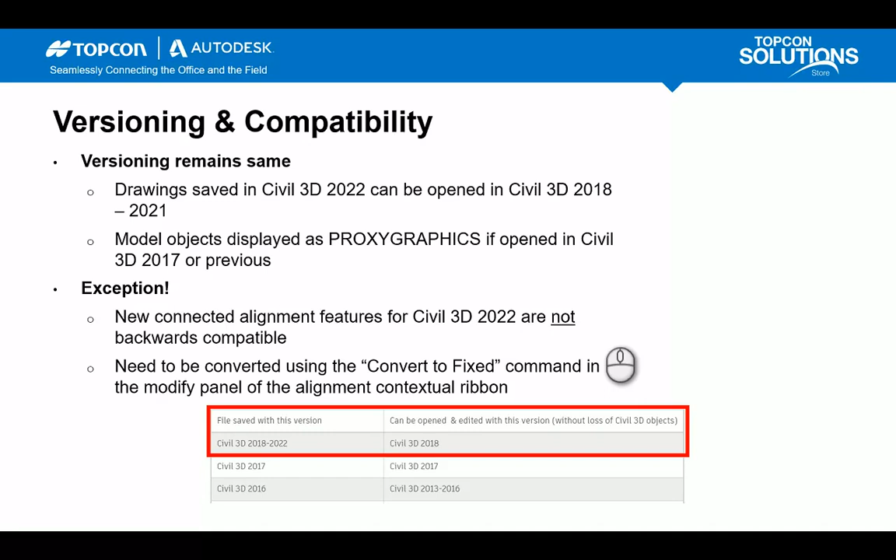With 2022, the versioning remains the same. So from 2018 to 2022, you can open a file and it's backwards compatible. That being said, there are some exceptions, and the exception is the connected alignment feature in Civil 3D 2022. They're not backwards compatible. So you need to use the convert to fixed command in order to revert that to a previous version. It's just because Civil 3D 2022 is looking at features that Civil 3D 2021 and previous can't see. So just keep in mind, if you're using the new connected alignment feature, you're not going to want to just open that up in 2021 or previous. You're going to want to use that convert to fixed command before going backwards.

You may have noticed when you install Civil 3D 2022, there's a welcome screen in the bottom right. It says, can you give us some feedback based on your industry? This isn't impacting your workflow in Civil 3D. It's not going to impact your profile or anything customized in that form. It's really for Autodesk to be able to look at who's using our software and how can we tailor that to the user's experience.

So they're just trying to understand how Civil 3D is being used and what updates to push, what enhancements to push, where to prioritize, backlogs in terms of where things are, where the software is going. So you may have noticed that, and I would hope down the road that maybe we see some things get tailored specifically to each user's needs.

So the installation experience is slightly different with 2022. We see some components that are a part of it, and we also see some components that are separate add-ons with it as well. So first thing, the Autodesk Batch Save utility. That was a separate add-on. You'd have to add it into your installation. It's not that it didn't come with the installation, you just had to select it to install. Now with 2022, that comes automatically with it, so you don't have to worry about, did I install the Batch Save utility when I was installing Civil 3D.

Storm and Sanitary Analysis, if you're unfamiliar, is a separate application from Civil 3D. It's launched separately, so you go through your Windows key, search storm and sanitary, and that would be launching Storm and Sanitary Analysis. This previously came with the Civil 3D installation, and now it comes separately. So you'll install Civil 3D 2022, and then you'll have an option to install Storm and Sanitary through the desktop app or at manage.autodesk.com. So you do need Civil 3D to install it, but it is a separate installation.

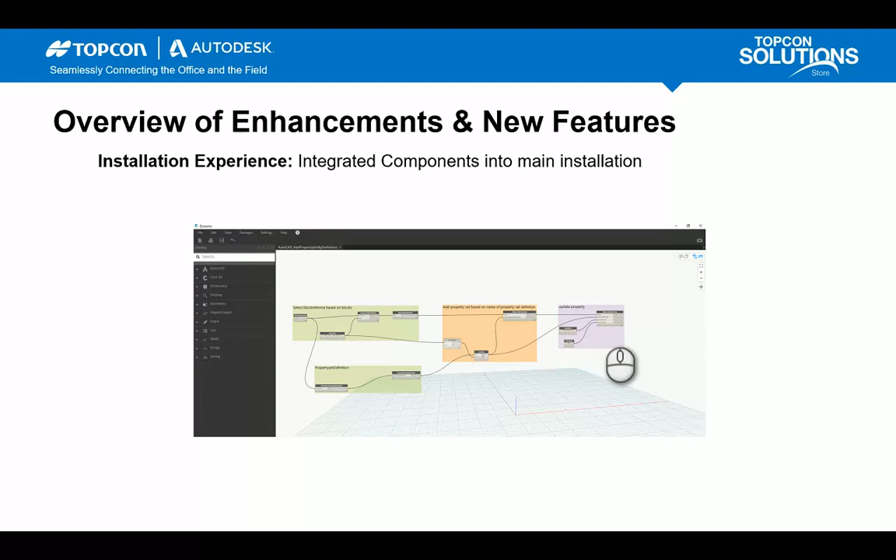So pressure networks, new features and commands. One thing you'll notice with the direction Autodesk has been trending is we're seeing a lot of enhancements, a lot of new workflows, a lot of changes for pressure networks. So the first thing that came out with Civil 3D 2022 is the regen pressure solid command. This command basically just regenerates 3D solids for pressure network parts. The profile ribbon is updated for pressure networks to make it more consistent with the plan layout ribbon.

Spanning labels created in plan and profile view. So you can create them in plan and profile view now. PVIs removed from overridden station ranges in profile view. So for PVIs that are set to static, when selected, the clean up PVIs checkbox on the pipe run profile settings dialog box removes the PVIs from the overridden station ranges.

And I'm just going to touch on the Civil 3D 2021.1 beta. So update 3 for that came out yesterday. What Autodesk does is they'll release these betas to the public through the Autodesk Infrastructure website. I have a link to that further down the presentation if you're interested. Autodesk will say, hey, we're going to release this beta. This is what we're thinking about including. If you'd like to test it, you can give us feedback on it.

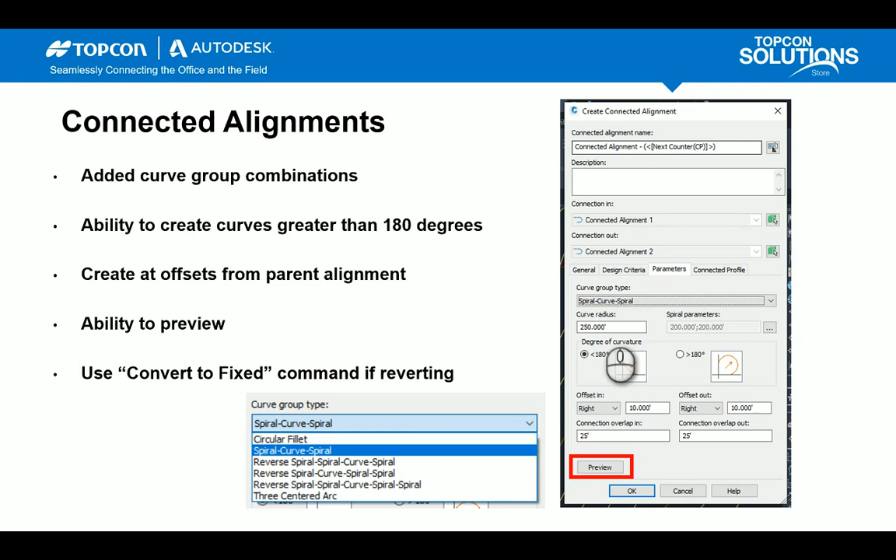So I'm just going to play this video here. This video was released by Autodesk, and it touches on the features of connected alignment and what they can do.

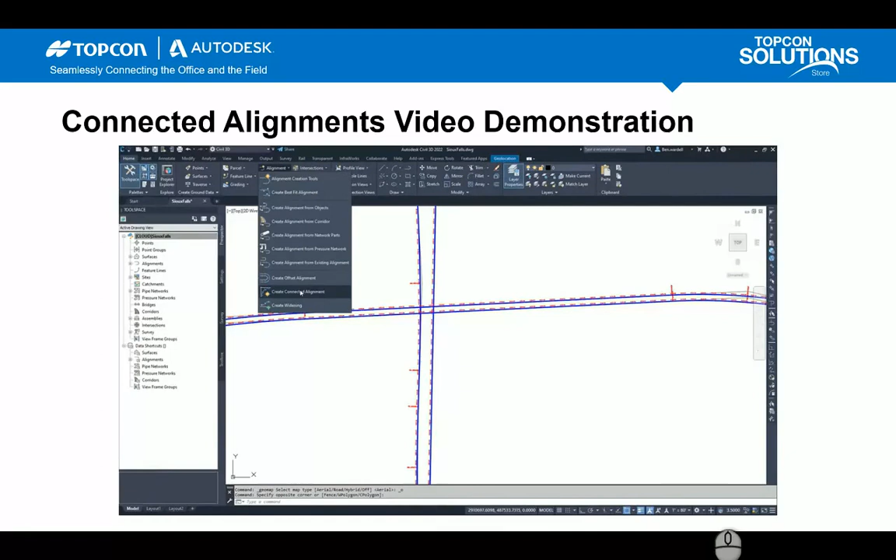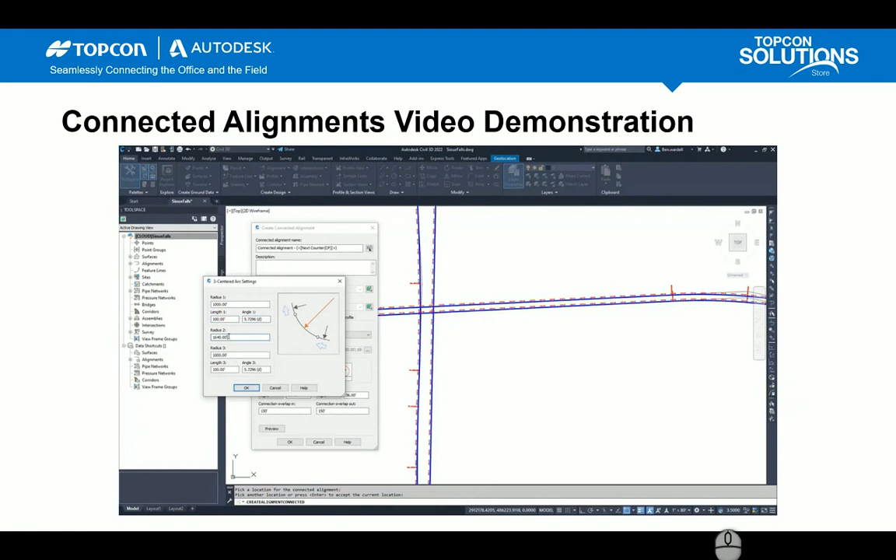Civil 3D, what's new for 2022: connected alignment. We're going to see here we have some sort of intersection design, with some alignments crossing, and we're going to create a connected alignment right here. You'll see that we have improved control—a lot of these features are the same, like the general design criteria, but this parameters tab is new, with multiple different curve group types. You have options to edit these arc parameters, adjust the lengths, make edits to the radiuses and those lengths, and create and add those into your drawing.

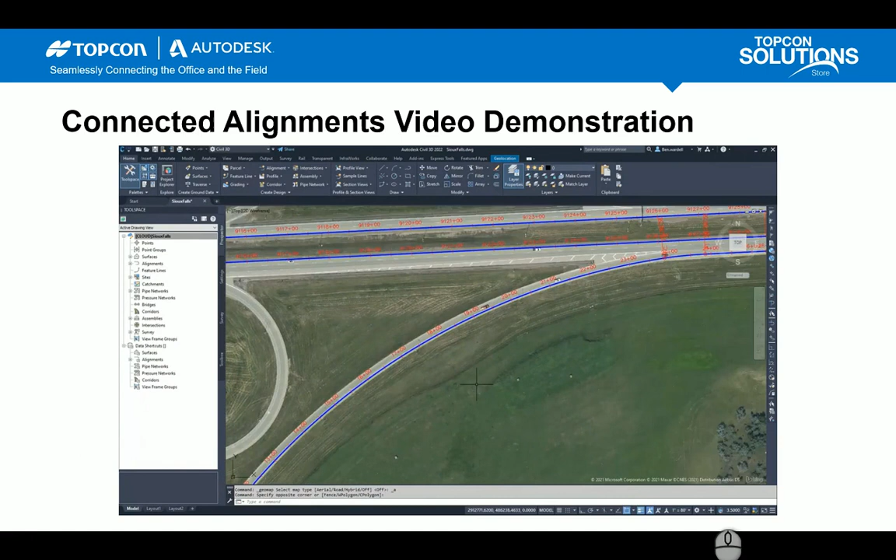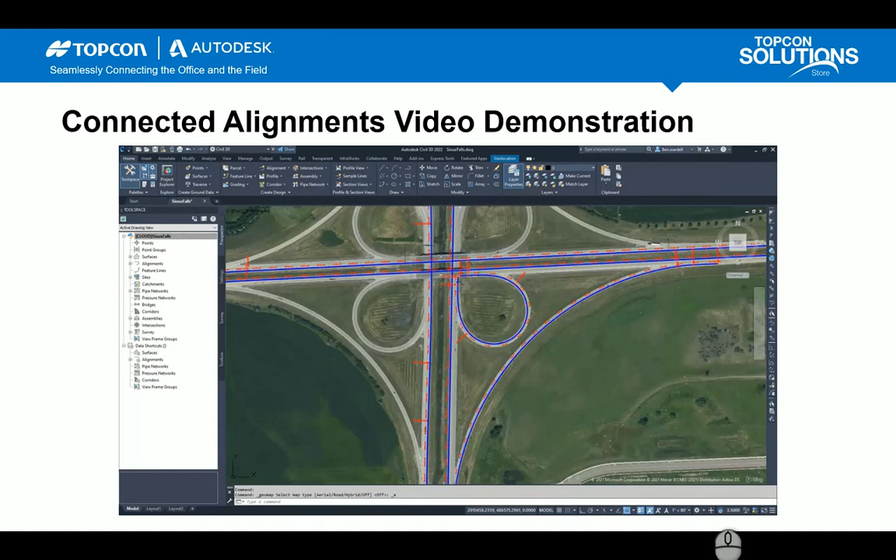The next thing you can do with connected alignments is create those larger than 180 degree curves, using the spiral-curve-spiral option, which you can edit as well. Select OK, and then connect those to the profile crossing alignments based on the offset cross-slope. In plan view, you can dynamically control the grips, which is directly tied to everything else, giving you precise intersection design based on the exact parameters you want. That's connected alignments in a nutshell.

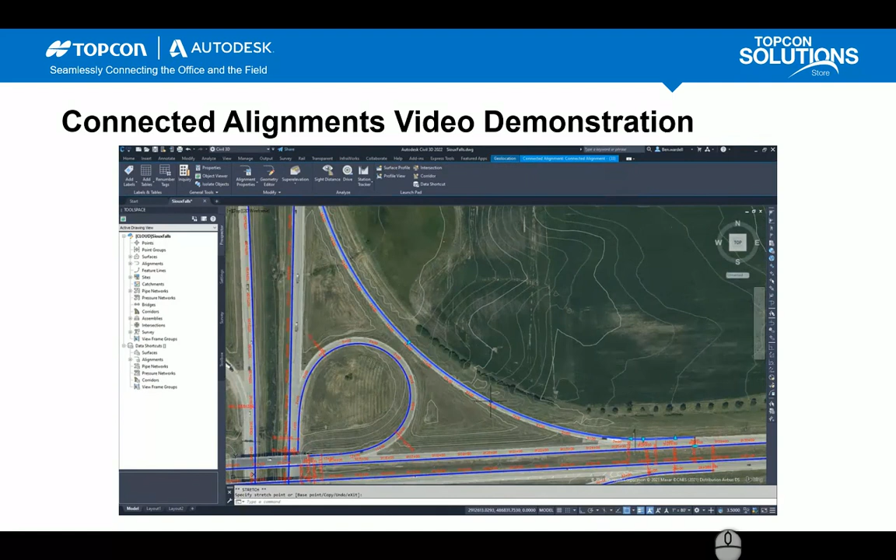Moving along, we're going to bounce into Project Explorer. Project Explorer came out about this time last year—Autodesk likes to debut products before AU and show where the product is going. One thing you'll notice with Project Explorer in 2022 is that it's now located on the Home tab. It used to be buried in one of the other tabs and was a little challenging to find, so now when you open Civil 3D, Project Explorer is right there on the Home tab.

Mainly what's happened with Project Explorer is they've enhanced the functionality already included with it. What we've seen with 2022 is added support for pressure networks, including the ability to display and edit pressure network information, edit multiple pressure network properties, include object sets for pressure networks, generate reports and tables for networks, parts, and pipe runs, compare pipe runs to other services and surfaces, and search for networks by name.

A lot of this is very similar to the features already included with gravity networks. One thing that was important for gravity networks was the ability to swap multiple gravity network parts at the same time. Pressure networks already has that included with Civil 3D, but it's done in plan view—you won't be able to swap them in Project Explorer, but you can swap them in plan view. All the other functionality is very similar to gravity networks.

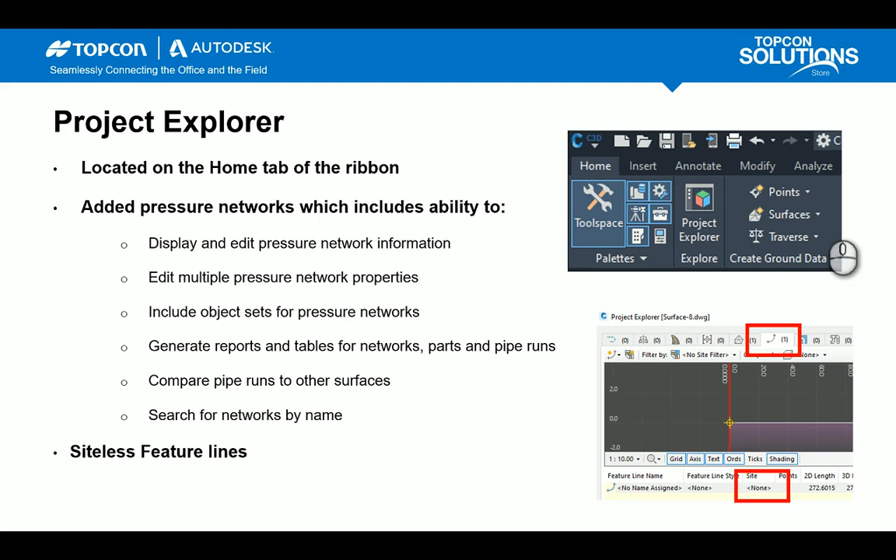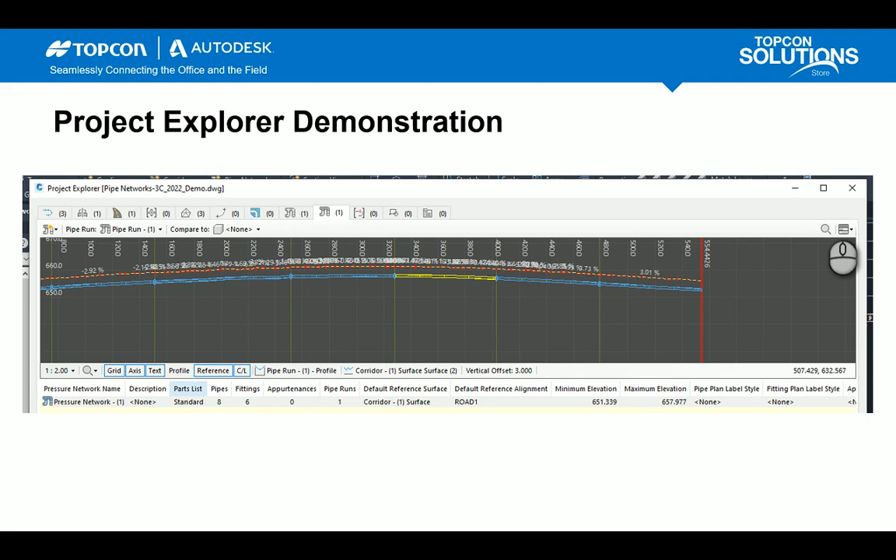Let's bounce over to Civil 3D. We're going to take a look at Project Explorer and generate a report for it with pressure networks to show you that workflow and what you can do with it. I'll also give a quick overview of customizing your Project Explorer view if you want to go that route. So jumping into Civil 3D here.

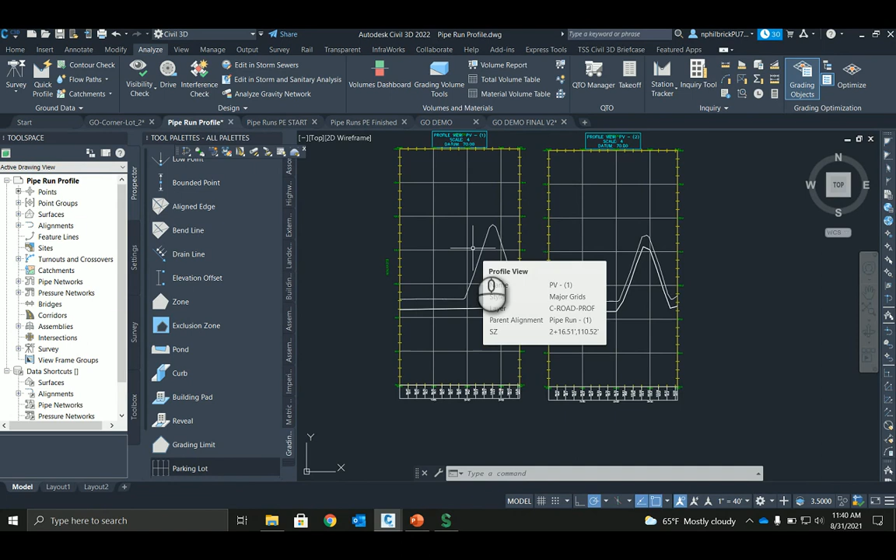First I wanted to talk about the pipe run workflow and what I meant by the parts list with that cut length. This is what Autodesk has also fixed with the beta build, or is moving in that direction to fix. I have two long pipes placed right over a hill, so we get some movement of the pipe trying to follow the surface. This first one was created in 2021, and you'll notice this pipe has no cut length defined, so it doesn't follow the surface based on the cut length. In 2022, you'll notice that it is following the surface now.

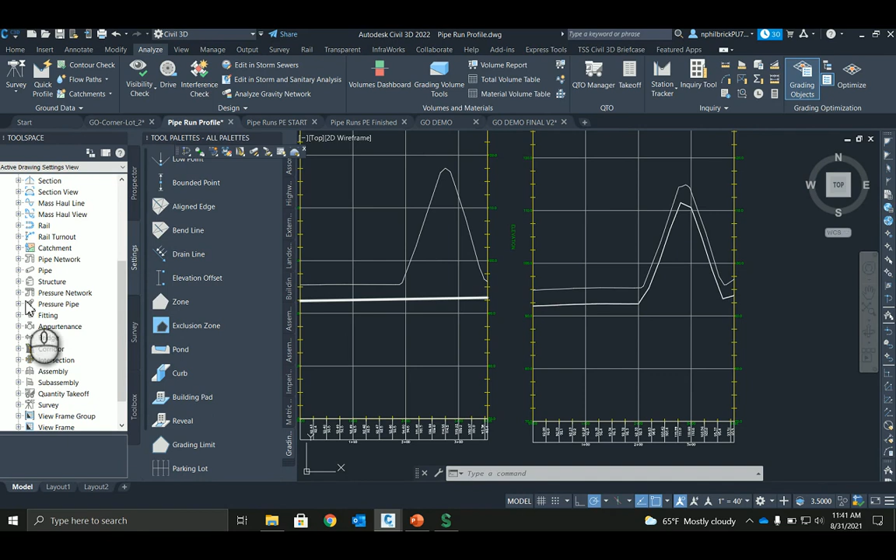One thing I find a little confusing is if you go into your pressure network parts list—let's edit this part list, and I'll show you where that cut length resides. Let's edit this one, the pipes. You see that this cut length is set at 20 feet, and this parts list is where you can change that cut length. This parts list I'm displaying is the HDPE parts list. A lot of the parts lists that come with the Civil 3D installation do not have a cut length defined.

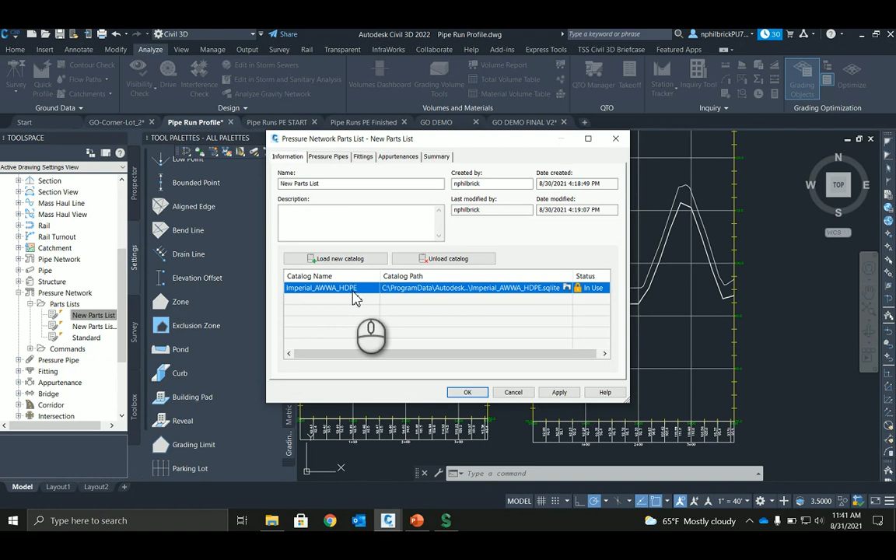So what it looks like happened is if you open up the content catalog editor, you can open up the pipes and see what the cut lengths are. A lot of them don't have them defined, but when you bring them into Civil 3D, they get assigned this 20-foot cut length. I'd encourage you to make sure your desired cut length is defined so the profiles display correctly. Autodesk is working towards fixing this, but also do your due diligence to make sure those cut lengths are defined. So moving over to Project Explorer here.

This is a fairly simple drawing, one of the tutorial drawings. We have a gravity network, a pressure network, a corridor, and a couple feature lines, one on a site, one not on a site. So Home tab, Project Explorer, and we're going to launch Project Explorer here.

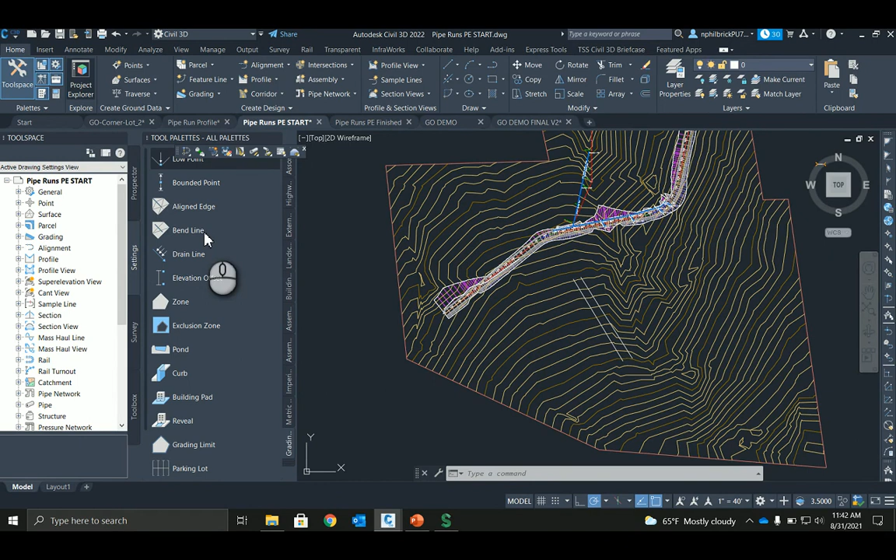There we go. Let me just try and make this as big as possible on this screen. Okay, here we go. In Project Explorer, you can see we have multiple tabs up here. This includes all the Civil 3D entities in the drawing - assemblies, corridors, surfaces.

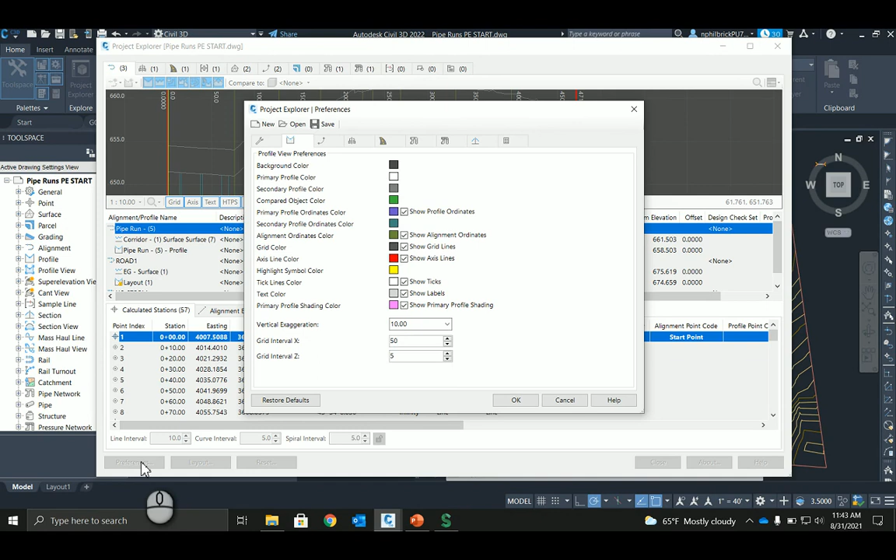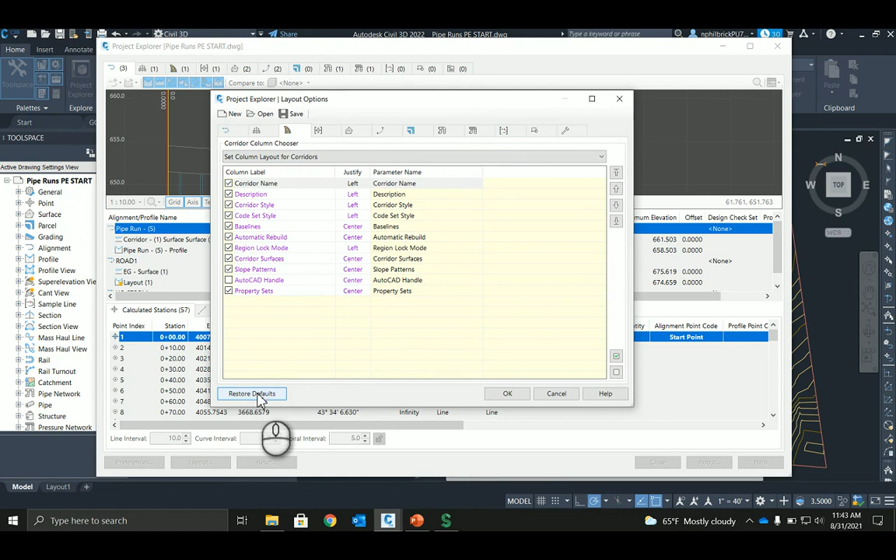One thing you can do here is customize your Project Explorer view. So preferences is all going to be your colors, basically how everything is displayed - it's not what content is displayed, it's how. You can make customizations with vertical exaggeration, grid interval in the Z direction, all editable in your preferences. In terms of layout, this is where you choose what content you want displayed in the Project Explorer window - there's a lot you can choose, and a lot you can choose to hide as well. I'm running it as the default, so the restore default command - you'll notice it probably looks exactly like how mine is displayed.

One thing you'll notice is, let's say I go to my pipe networks here - pipe network, give that a second to load - you'll notice there's a lot of blank columns. Some columns may not be necessary, so you can definitely customize things to what you want to have.

Moving into what's new, the pressure networks right here - this is the new tab you're going to see in Project Explorer. All those features that are with gravity networks are very similar with pressure networks now. What I'm going to do is add that, I'm going to create an object set. We're going to create a pressure network report, place it in Plan View in Civil 3D, and I'll show you how to create those tables and customizations if you want to go that route. It's really just a great way to view your data and create tables easily.

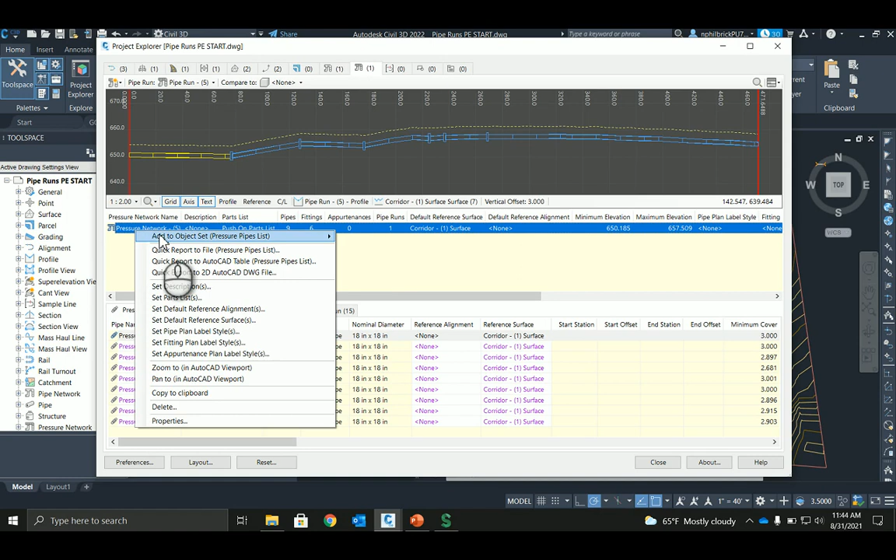So this pressure network right here, pressure network 5, this is with that push-on parts list that comes with the Civil 3D installation. It's got 9 pipes, 6 fittings, and it's 1 pipe run. What we're going to do is say add to object set, and we're just going to create a new object set. It's asking for a new one because I don't have one created, so we'll just call this pressure network object set.

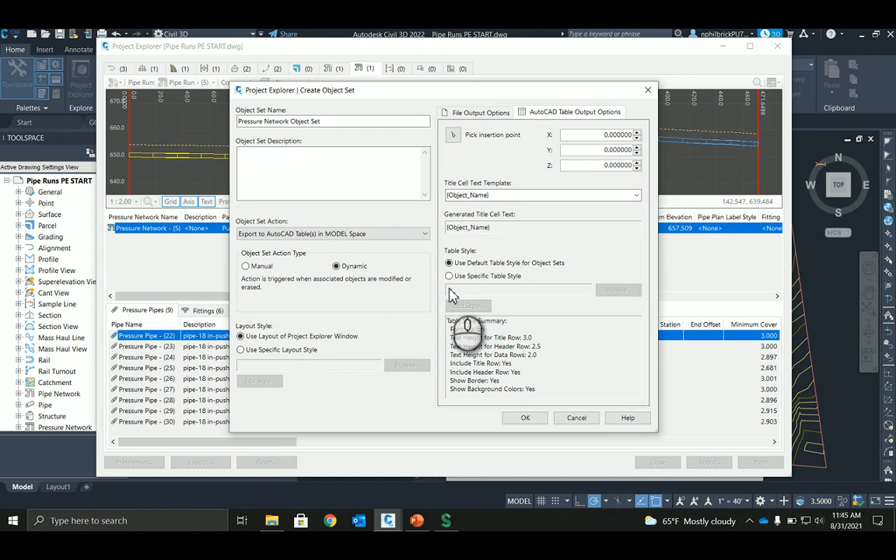This is where it's going to ask you what action you want for the object set. What I'm going to do is say export to AutoCAD tables in model space. Then you have an option to select action type - manual, dynamic, actions triggered when associated objects are modified or erased. This is where you can get into the customizations, the layout style. I'm going to leave it as the default, but you can go in here, edit style, and then edit how the layout is portrayed. There's a lot you can do in here.

One thing about the object set is that object sets aren't tied to a specific part. So it's not like pressure networks are the object set - you can have, for example, that gravity network in that same object set.

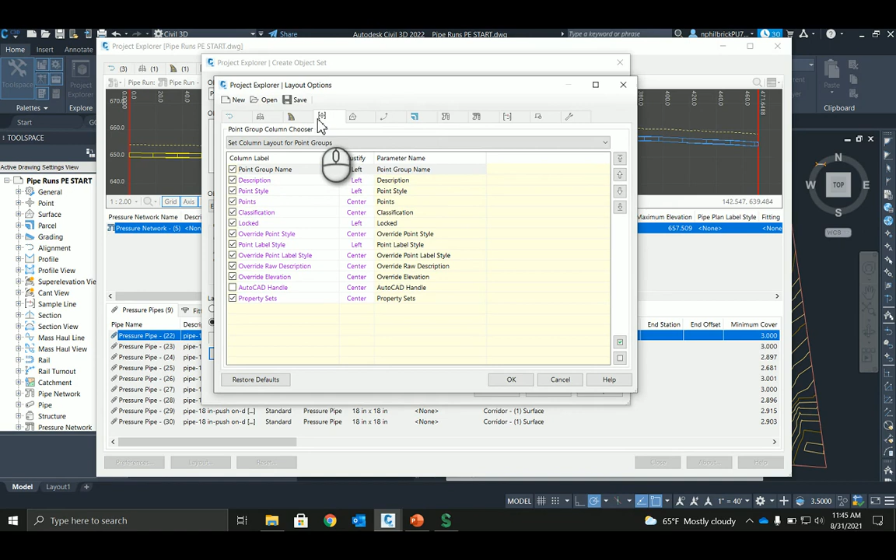Let's just leave this as the default. Oh, and one other thing with the object styles is you can save them, and then you can load them in, so you can have your set standards that you want your tables to look like and whatnot. And then we'll use layout, so that's grayed out. And then table style, same exact thing. Customize that. You can load in your custom ones. So plenty of customizations you can do with those reports.

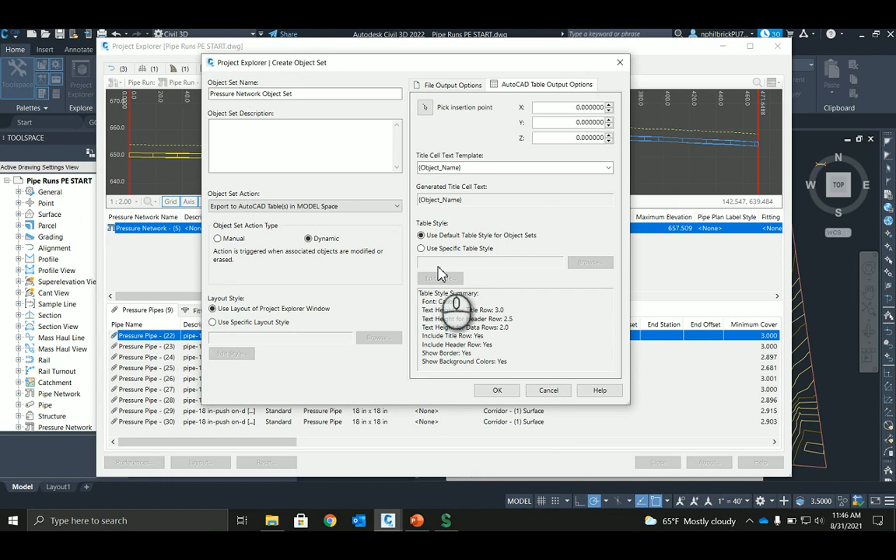And when we say OK here, it's going to say object set added. There we go. New object set was successfully created. Now it contains 1 object. Okay, cool. So then if we go over here to the reports tab, you're going to see now we have a 1 here. That means we have an object set. And then here's the object set.

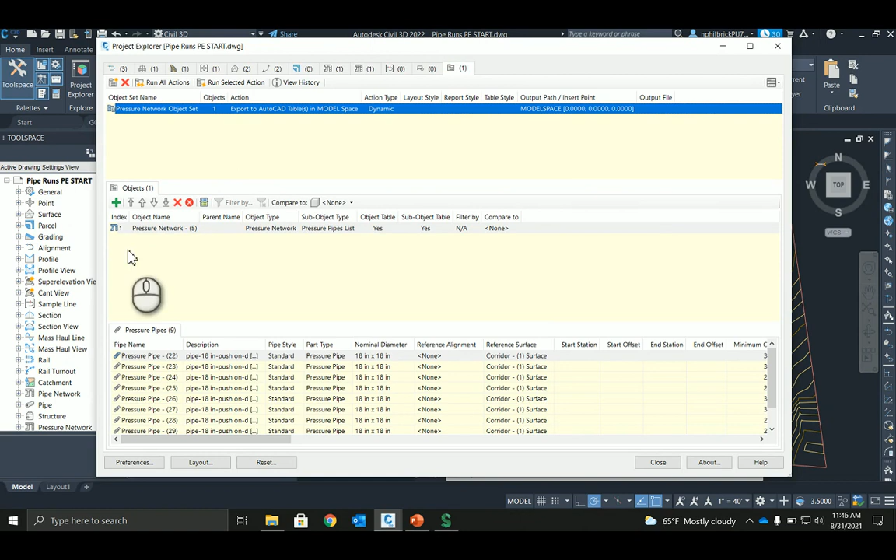So this is it. Action, export to AutoCAD tables, dynamic, model space insertion point. And then here's the pressure network. And then quick report to AutoCAD table. And then use layout. So we'll just leave it all the standard. Use Project Explorer table style. Use Project Explorer window. And then we're going to say OK.

And then you're going to see down here on the command line, it says enter table insertion point. So I'm just going to minimize this here. And we're just going to come over here to some blank space. And you're going to see that created that table for that pressure network.

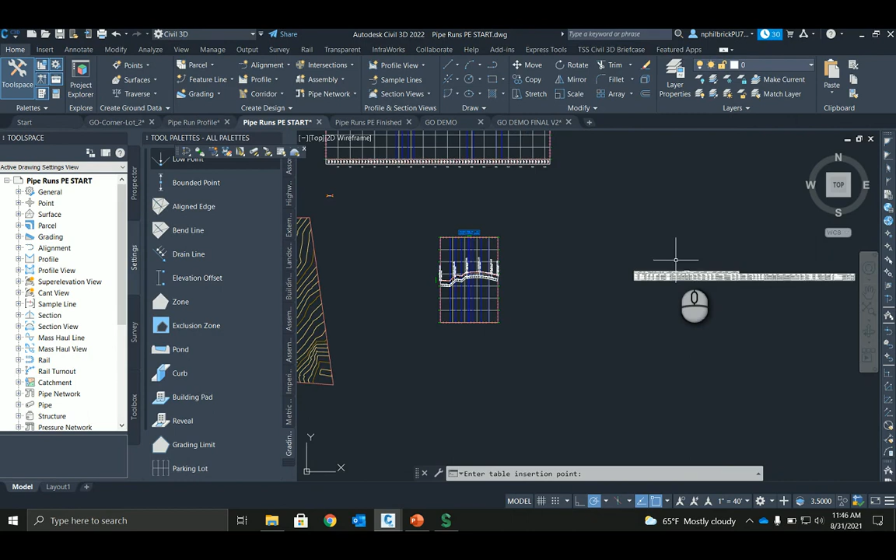So nothing's really changed in terms of Project Explorer a whole lot in terms of what it could do when it first came out versus what it can do now. But there's just a lot of added features to it, pressure networks, siteless feature lines that are included. And moving along here, back to the presentation.

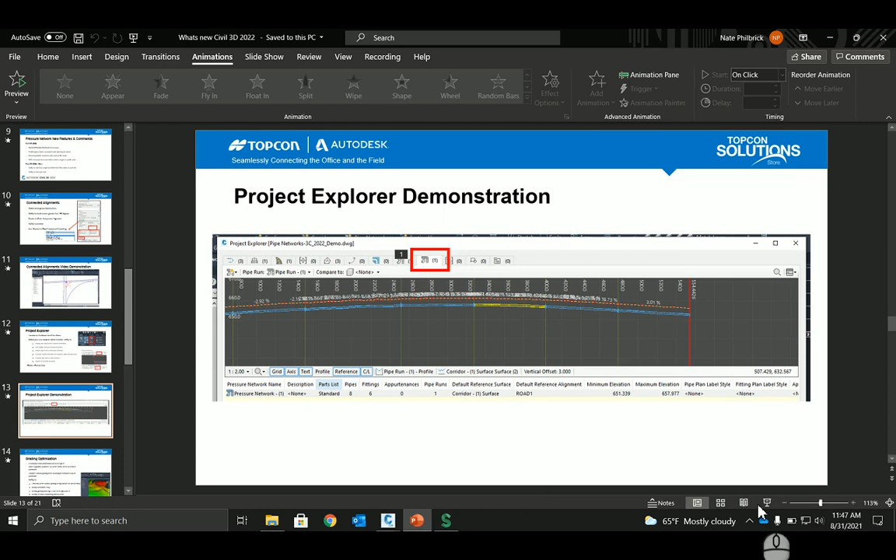Okay, grading optimization. This is by far my favorite thing that's new with Civil 3D 2022. I spent a lot of time playing around with it. It's definitely a bit different in how it works. It's got an optimizer. It uses a computer algorithm. It'll run for 10, 15, 20 minutes and just keep on optimizing that surface. It's a super cool tool, but it's definitely something that's a bit different.

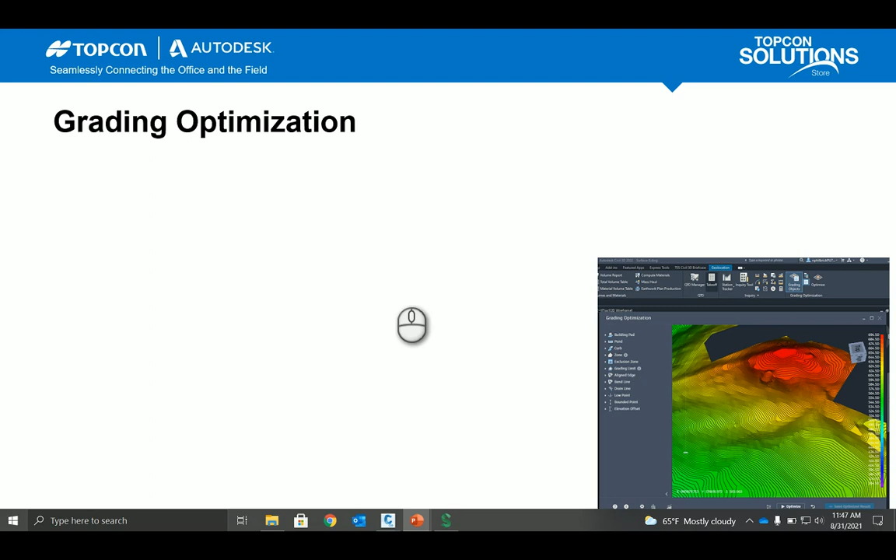And we'll go over the process to create that project and what to look for, where it fits into your design needs and whatnot. So grading optimization is a great preliminary terrain optimization tool for designers. Utilizes an algorithm commonly referred to as the optimizer. Creates a surface based on defined constraints. So those constraints are in a polyline format. You have your lines and add those in, and then the optimizer will go through and pick like, okay, we can do this here, we can do that here.

One thing that's nice about this is it eliminates manual grading tasks according to customized object constraints. So it doesn't need to be perfect in what you're doing, but if you have an idea, you can run the optimizer several iterations and get a real good idea of what would be the best scenario that minimizes cut and fill if you want.

And what grading optimization does, it gives you the ability to efficiently create multiple grading design options for consideration. It's really easy to turn grading options off, turn them on, rerun the optimizer. You can send multiple surfaces back to Civil 3D, and you can just keep iterating it to get exactly what you want. You can easily modify the constraints. You can identify grading challenges early in your design process and identify scenarios minimizing material waste.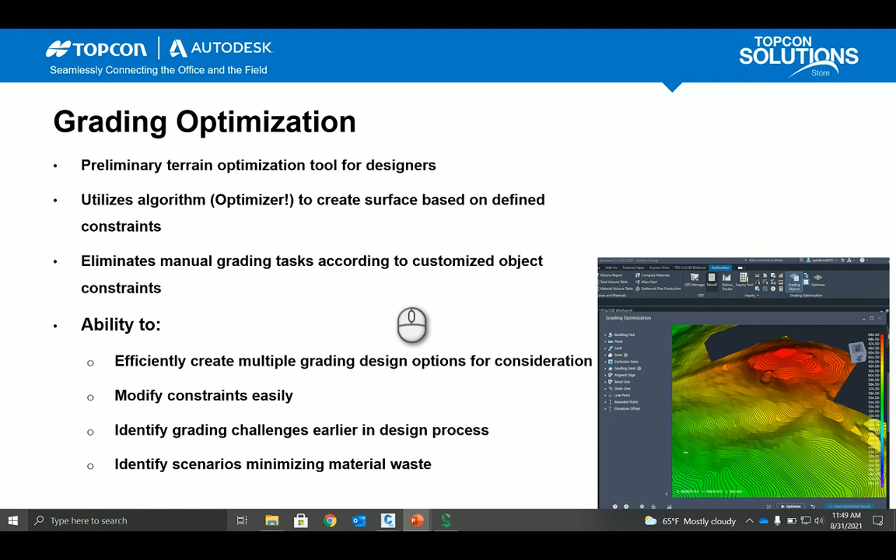And a couple of things that you do need before you get into grading optimization. The first thing that you need is a surface representing existing grade. You need to define boundaries representing grading limit within the extent of the EG surface. So basically, what you're trying to grade needs to be within the EG surface constraints. Some idea of your drainage plan or direction. You can be pretty broad with grading optimization in terms of what you want to do, but a general consensus, like we're trying to go in this direction. You definitely need to have that before you get into it.

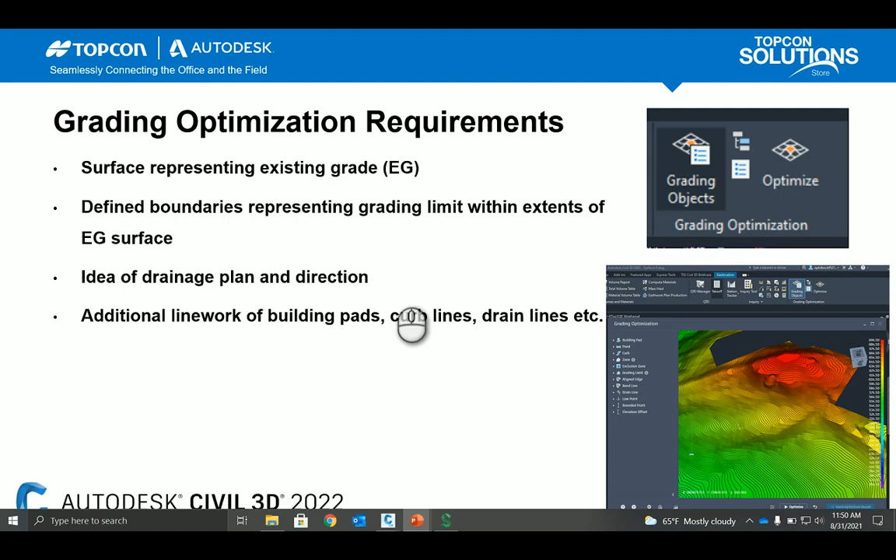And it's good to have, it's not fully needed, but additional line work, building pads, curb lines, drain lines. The more data you have in there, the more accurate your surface is going to be, and the better idea you can get of where grading issues may lie, or developing that design. Grading optimization layout. So there's two main entities of grading objects.

First one's the grading object tools. So this is basically all the options for what you can create, and you have the options to customize this as you go. So you could right click on this, click on the properties, and customize them if you had a bunch of different grading objects that were going to carry the same standards.

The second thing you'll notice that is part of the grading optimization panel is the grading objects browser. What this displays is what has been created with the object tools. So for example, you see that top one there is building pad. None of these in the objects browser have anything in them, but the building pad will show a 1 next to it if you have one building pad defined in your drawing, or one pond, one curb, and you can have multiple of the same thing as well.

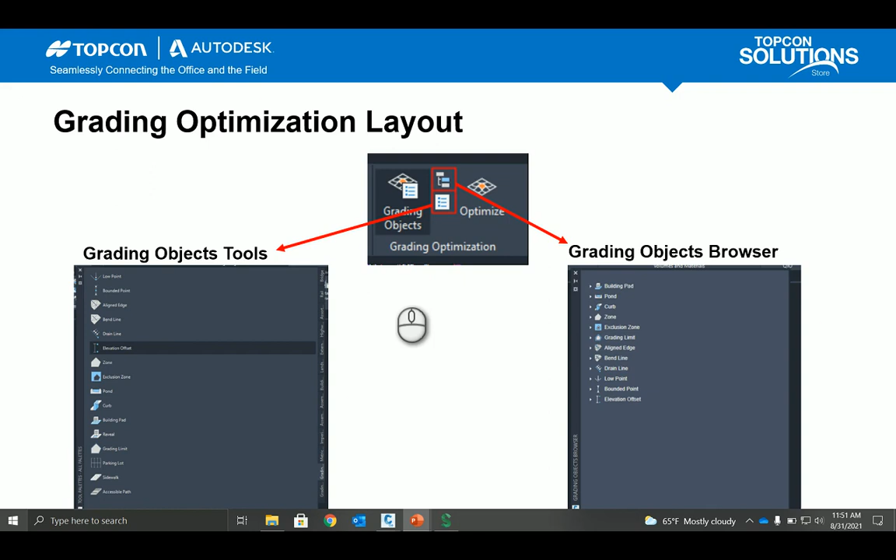And then the types of grading objects, from that grading object tools. There's 3 different types of objects you can have in your drawing. The first are points, and that's low point and bounded point. A low point is the lowest point in an optimized area, and a bounded point sets an elevation point to a bounded target. These will be COGO points in your drawing.

The second type of grading object is lines, and there's several different types of lines: aligned edge, bend line. Drain line is going to be pretty popular for your use. What that's going to define is your drain lines in your grading plan. One thing to note with your drain lines is it's important how that line was drawn. The first point to the end point is going to be the way it's draining, even though there's no 3D entities to it. So it's important to make sure that how you're drawing those lines is how you physically want it to drain.

And one thing that'll actually be part of 2 is curbs. So a curb can be a line, and it can also be a zone, which we'll get to in a second. And a reveal line, used in conjunction with building pads to override elevations for items such as ramps, stairs, and truck wells.

And then the last thing is zones. Zones are going to be one of the more popular things used, and there's several different types of zones. The qualification for a zone is it needs to be a closed entity. It can be any shape, but it needs to be closed, versus a line, which would just be a line in your drawing. Touching on the zones, the plane zone is a number of bounded areas represented by a polyline. They're layered in a hierarchy of overriding criteria and behavior, so you can have multiple zones on top of each other.

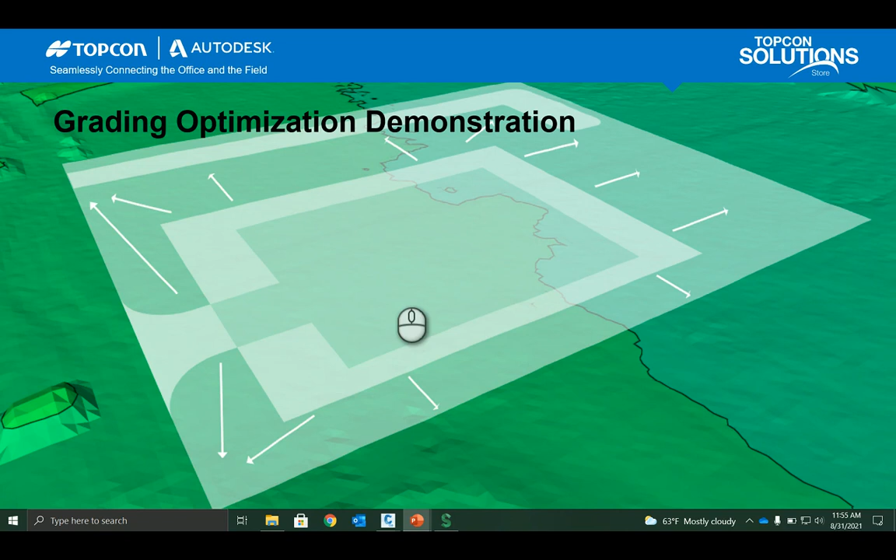And we're going to bounce over quickly to grading optimization. I'm going to take you through a project that I've developed. The building pad with some sloping. We created a pond, and we got a sidewalk in there. I'll just show you my process for how I created it. So let me bounce out of here, and then let's go into this grading optimization. Okay.

And this is a pretty cool project to me because I collected all this data, and it's at a school right near my house. So it's definitely cool to work on something that's close to home, and you can come up with some ideas of what would be around your house. So just to give you an idea how this data was collected.

So I have a drone, and I flew the drone over this site, taking photos with a pretty good overlap, and then I brought that project into ReCap Photo, stitched all those photos together, and then that ReCap Photo project created that mesh file and that point cloud output. And then what I did is I used InfraWorks to create a surface in Model Builder.

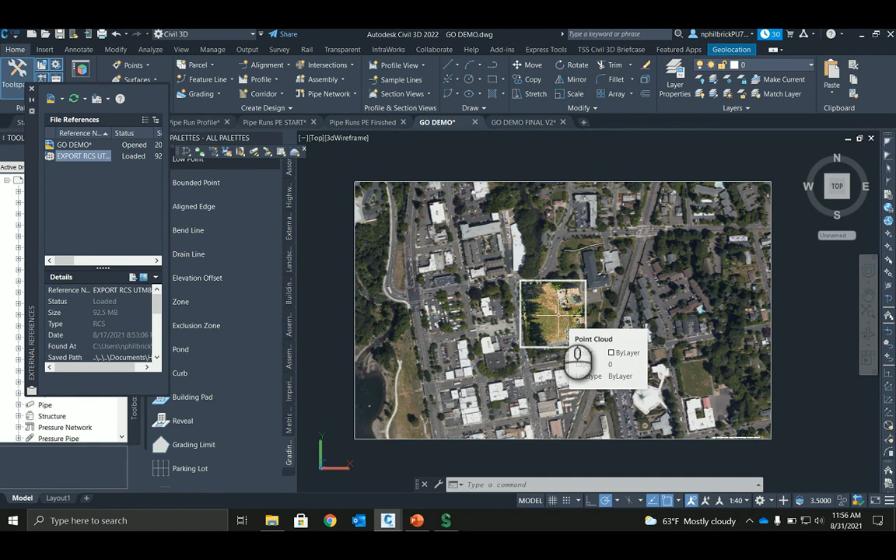So I've just defined this region right here. If I zoom out here, this is the region I defined in Model Builder. And what Model Builder does is it creates that generic, fairly accurate surface. It's not super accurate. And then what I did is I brought in that point cloud data and enhanced this surface region right here. And when we start to display the contours, you'll notice that there's a lot more triangulation in that point cloud region.

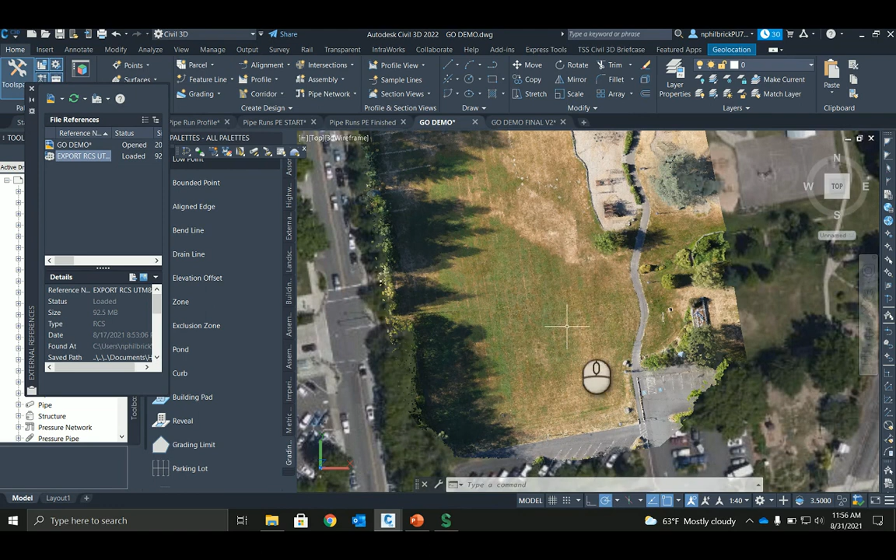And so this region right here, as I was thinking, how could I make a grading optimization design here? What would be a good idea? And I was thinking maybe some sort of athletics building in this region right here, a building pad sloping down from it. I wanted to have some sort of road or path driving up to it. So if you're driving a lawnmower or an ATV of some sort, you can get back up to the building. And then I also put a sidewalk walking around the perimeter of it.

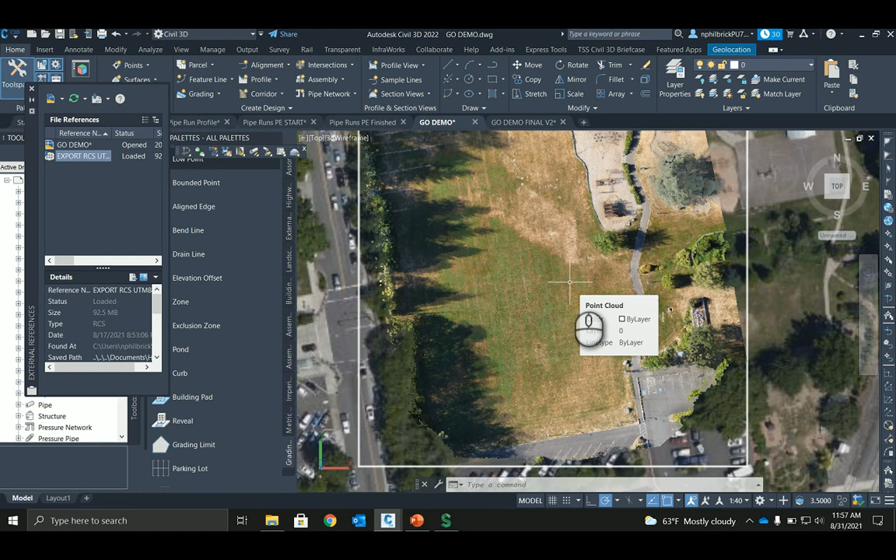But it was definitely a fun project to play around with, and definitely learn the ins and outs of grading optimization. So I'm just going to go ahead and unload this point cloud now that I gave you some background and we don't necessarily need it anymore. And this is my grading plan right here. We're just going to go through and add a few things to it. Let me close this here, and we'll leave that open. I'm just going to turn on the EG surface.

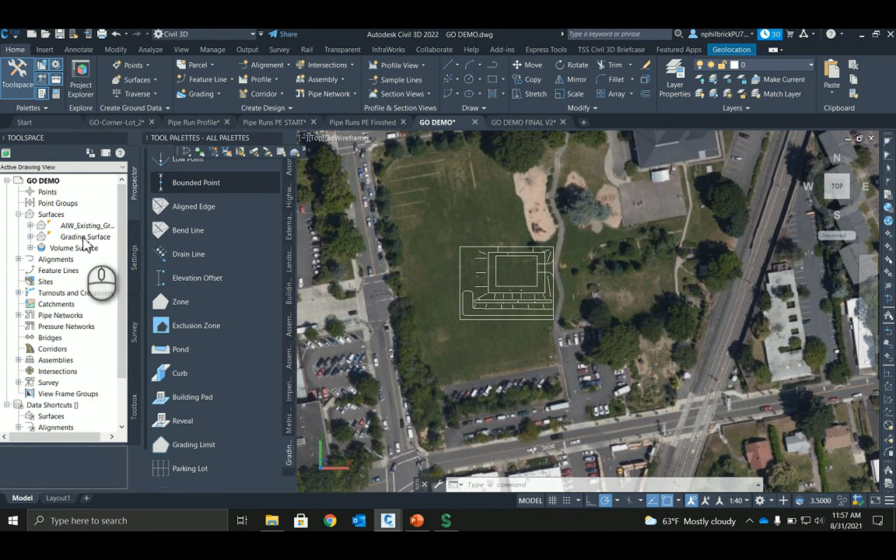Okay, so you can see we have some contours in now. You can see those Model Builder contours on the outskirts. We have those more accurate contours where the drone imagery was added in. And this is my grading plan. These are all polylines created. And what we're going to do is add in some grading objects. So Analyze tab, click on the grading objects, we get the tool palette, and then we get the grading objects browser.

And I already have a few things added in here. You're going to see I created a pond right here. I was thinking some sort of detention pond that's going to slope down from the building, and it'll slope off the sidewalk. And close that here. And then I created a curb right here as well. And we'll just add in a few things here.

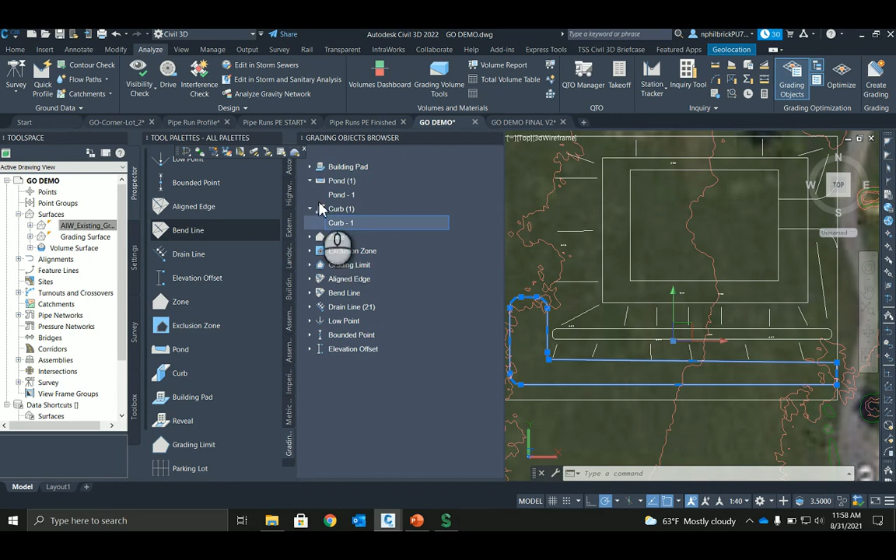And one thing that can be a little bit confusing is that when you add something in, it can seem like there's no way to get rid of it. You have to select that polyline, and if you select this and then select the delete button, that's physically going to remove the polyline in the drawing. So what you're going to want to do is right click and then say remove curb.

So that'll remove the curb entity from that polyline. And I'm going to go ahead and close the curb properties. So let's go ahead and add in a building pad here. So this is my proposed building pad area. And what we're going to do is we're going to go down here to building pad. Actually, let me deselect that.

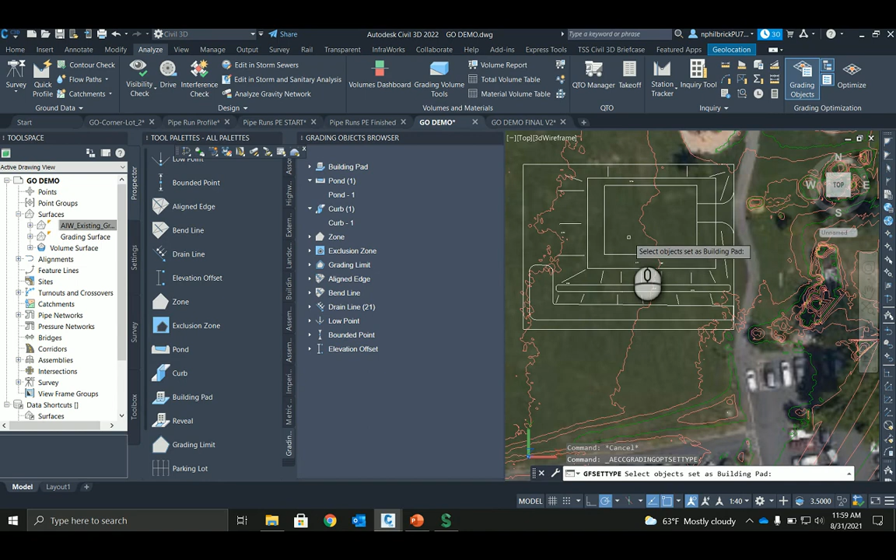Okay, building pad. And it's going to say select objects to set as building pad. Say okay. And then I'm going to give it an elevation. And I'm just going to say fixed elevation value. And this is what I was saying earlier, you can have an elevation range. So if you have an idea of the range, but I'm going to set mine right at an elevation of 13.5 feet.

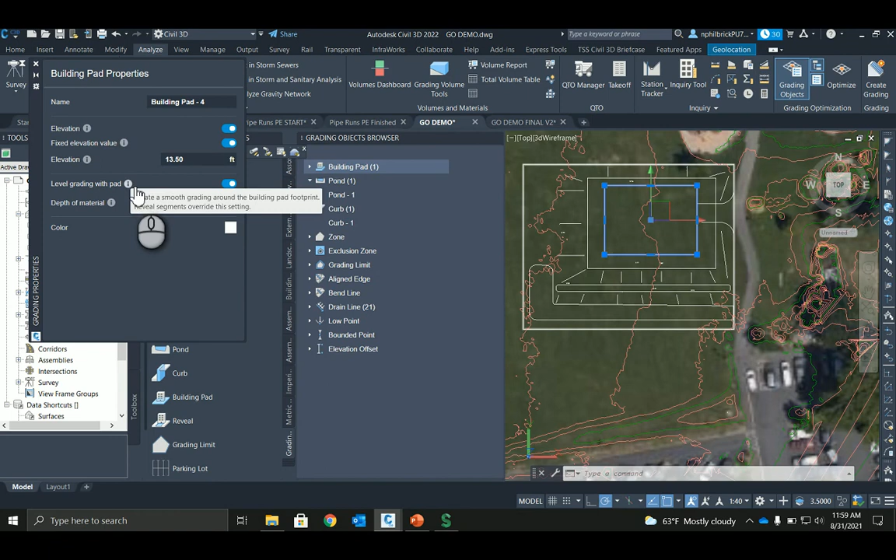There we go. And then level grading with pad, create a smooth grading around the building pad footprint, reveal segments overriding this setting. I'm going to leave that, and I'm going to close this. And you're going to see here now we have that building pad included into our plan. I'm going to add in a grading limit here, and that's the extent of what we are grading.

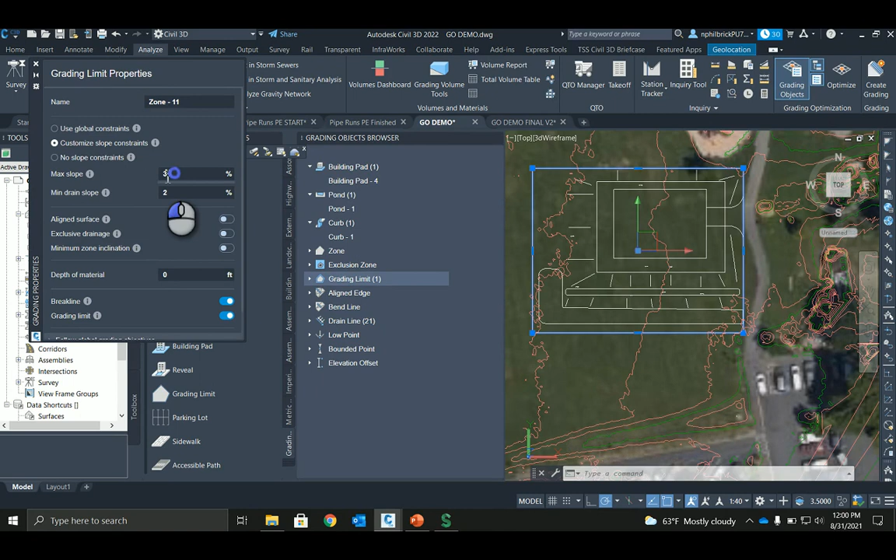And zone 11, and I'm going to use customized slope constraints. One thing to note is that if you're trying to grade with a max slope of some sort, say for example you want to grade with a slope of 3 to 1, that's going to be a max slope of 33%. And then you can have options for your min drain slope. Keep in mind you're punching in ranges, so the optimizer is going to go through and say, okay, we can make this 20% or we can make it 10% or something like that.

And then you have options for aligned surface or exclusive drainage. It's either one or the other. So an aligned surface requires that the triangles in the zone align themselves on a plane. This property cannot be combined with exclusive drainage. So if you select the align to surface, you'll notice that one's no longer enabled.

And then minimum zone inclination guarantees every triangle on the surface has a min required inclination into a given slope. And when you set this, you're going to want to make sure that this grading limit is selected here. And then we'll say yes, we'll add break lines, and we'll close this. So now that we have a grading limit defined, let's see if there's anything else we need to define in this drawing. Okay, zones. You can apply zones on top of each other and they're based on hierarchy.

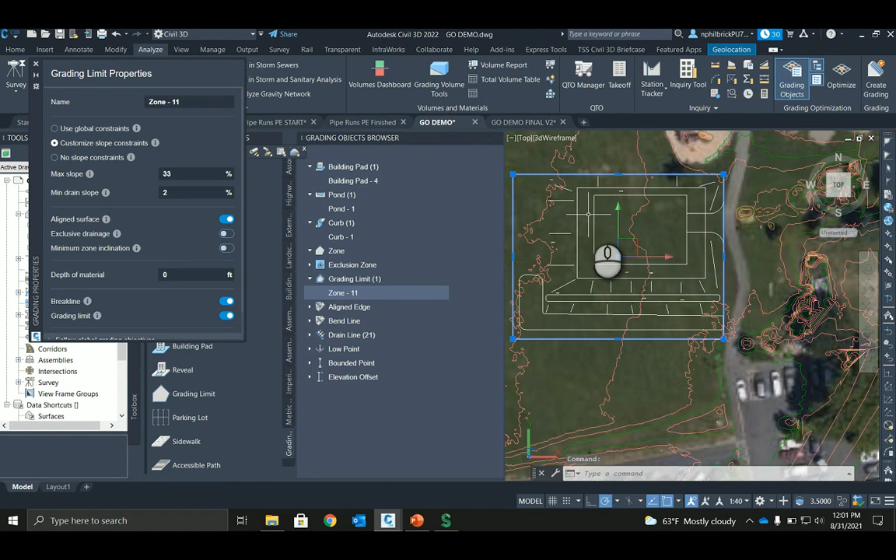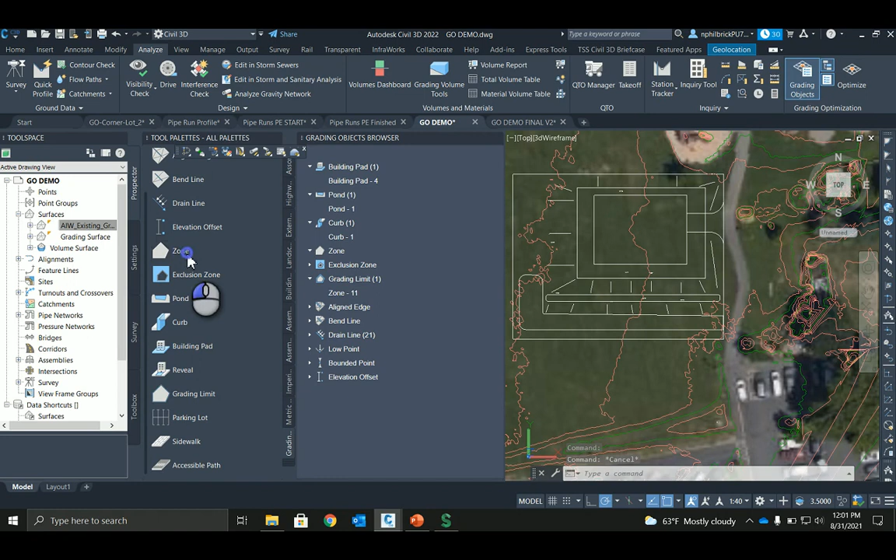So let's go ahead and add a zone right here. What I wanted to do is create a flat area around the building pad for use around the building, park that lawnmower, something like that. Work on that lawnmower. So I'm going to go down to zones, and then it's going to say select object to set as zone. Say okay. And then you have options here.

You can use global constraints, customize slope constraints. What I was thinking of doing was maybe like a 3% to a 1% slope. So we have some slope, but it's pretty level. So that's what I was thinking in terms of that table up top there. And then you have the same thing that was in that previous zone, the align to surface, exclusive drainage, whatnot.

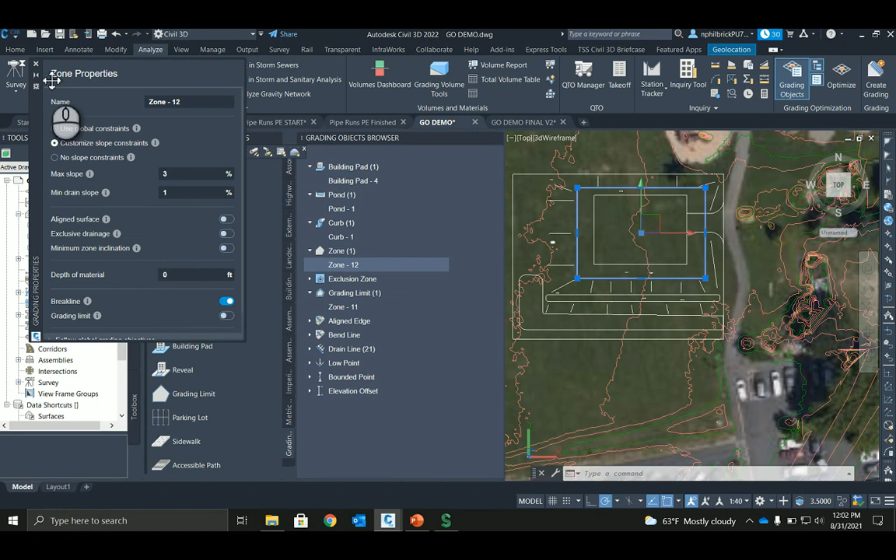I'm not going to go through and add all these just for time's sake, but you'll notice that this is the pond I've added in right here. There's a nice diagram when you create those ponds in terms of your berm, your depth, height of water, whatnot. And then here's a sidewalk I created right here. And then I also added in some drain lines. You probably don't need this many drain lines when creating your grading plan, but I wanted to slope down around the building, so that's where I ended up adding them in.

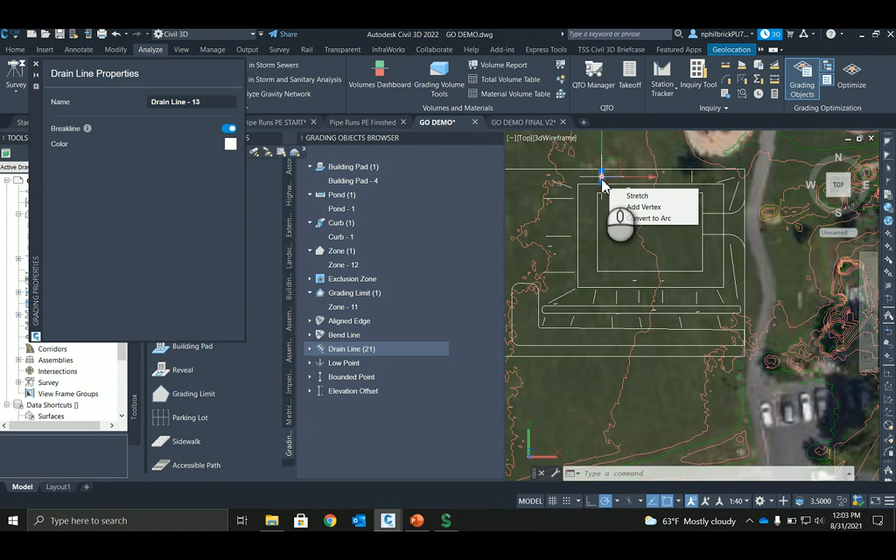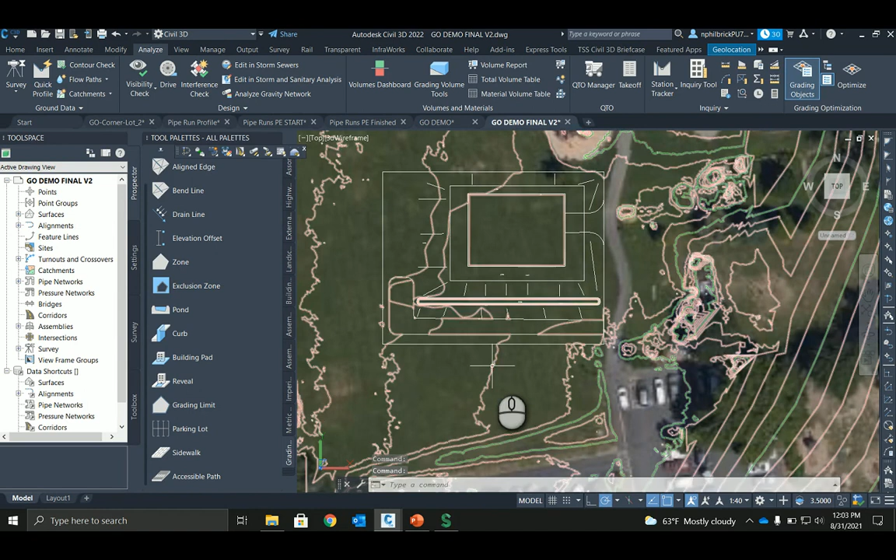So, all right, let's bounce over to this other drawing here. This one has a bunch of those grading objects added into it. And what we're going to do is get into the grading optimizer. Let me just turn this up here. Let's go to surface properties, display.

And then here, surfaces, surface properties. Okay, so this is the EG surface. I've already sent back the graded surface, but we'll take a look at that afterwards. So optimize. Then it's going to ask you which surface you want us to work with. And so we just selected that EG surface, and then you're going to see this grading optimization window start to launch.

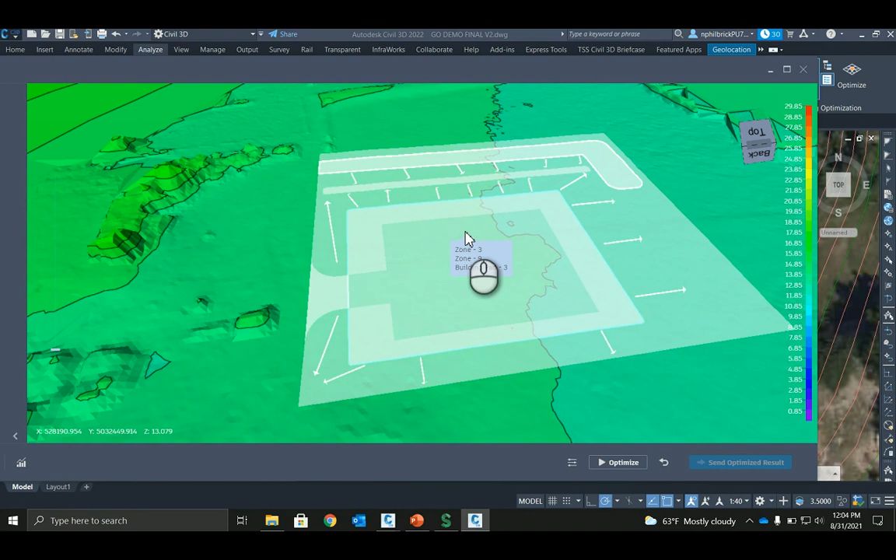You can see this is our drone surface. Then we have that broader model builder surface. You can see those drain lines are pointed away from the building. So when I said that's how you're going to want to draw, first point to second point, that's the way it's going to drain. And then we have our building pad right here. Then we have our grading limit properties. You can see all these features right here.

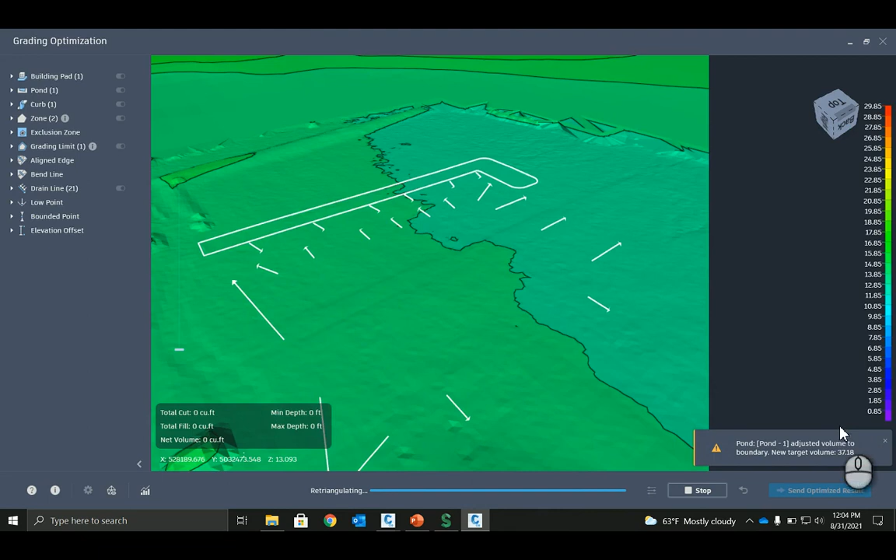And then I'm going to go ahead and start optimizing. So this button right here is optimize. When you select this, it's going to start retriangulating. What this basically says right here is we're just going to change your pond volume. And then you're going to see that the surface starts to change. There's a lot of great visualization tools as you get working with it. For example, you can display those triangles, and you can see that things are starting to move, starting to think. It's starting to create that building pad and follow those drain lines.

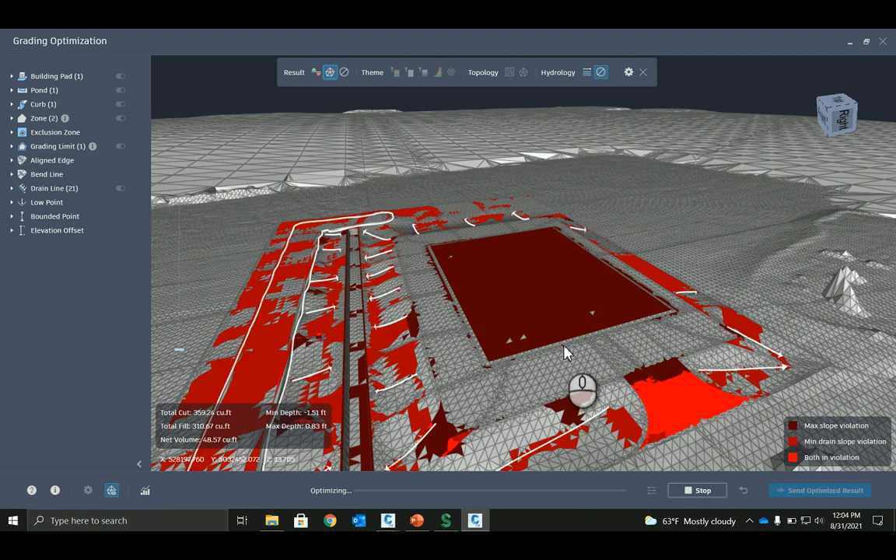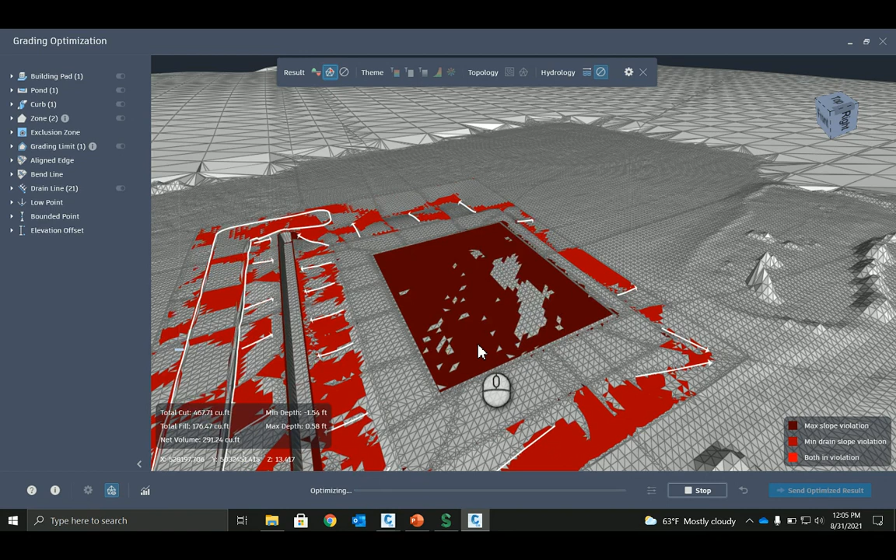One thing that I find to be really helpful when you're working is this violation. Basically, if the slope is outside what your constraints were when you were creating those grading limits, you can see where things are violated. As the optimizer runs, you should be seeing less of those violations display. For example, let's find a spot that's red. Sometimes it'll fix things as it's figuring things out. So the slope is 0.14% and the max slope of the building pad was set to 0%. So it'll work through that as things go.

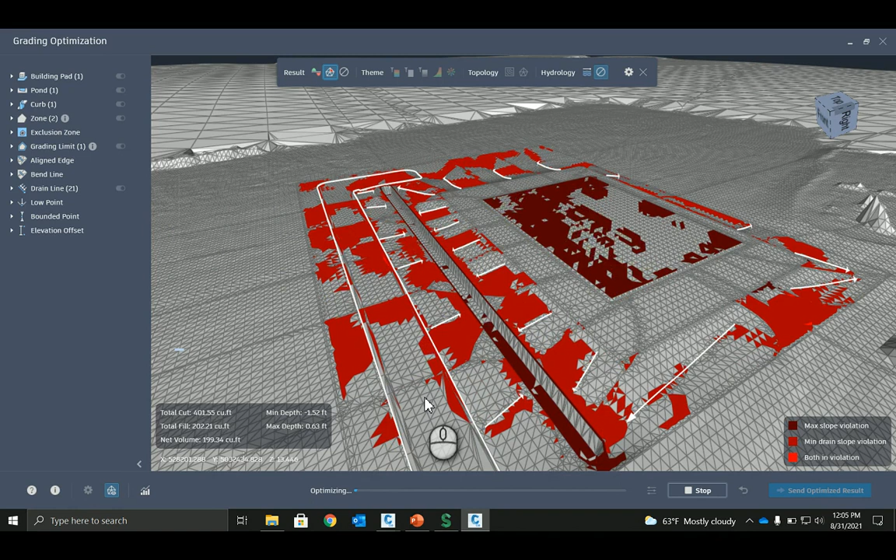And then you can, for example, come over here and see what's going on with my sidewalk. For the most part, you can run this whole thing and you'll notice that things are slightly off, like 0.05% too small or too large or something of that nature. And then you can also display your cut and fill as well. One thing that's also nice: when I was going through it, I was deleting the grading objects from within Civil 3D versus doing it in the optimizer.

While it's running you can't, but if you were to stop running it, you can deselect the building pads from being run in the plan. So you can have multiple different ideas of what you want to do, and then change and re-optimize without deleting them and re-adding them. And you can also change these constraints. You'll notice that they're grayed out. That's because it's optimizing based on those constraints right now, but if you were to stop optimizing, you could change these constraints and rerun it again.

The convergence plots, oh, those should be launching. Where are you? Well, the convergence plots should be launching, but if they were, they'll show you three things: your cut and fill, your terrain smoothness, and at the top a logarithmic scale. What you want to see is that logarithmic scale trending downwards. If it's trending down and then back up a little bit, that's totally fine, but you want to see it trending down. The closer to the bottom of the graph it gets, the more accurate your data is going to be.

I definitely encourage you to let it run, go get a coffee, let it run for 10-15 minutes if you're really trying to get highly accurate results with that final surface, and then you can see those results. But pay attention to that convergence plot, because when it starts going down to zero, gets near the bottom, that's when you know you're getting fairly good optimized results.

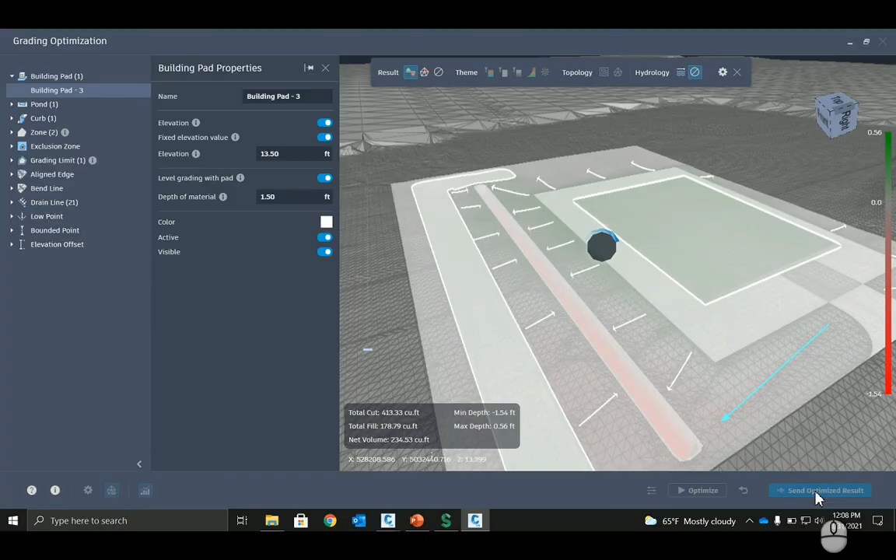I'll just say stop here. I would definitely run this 10 to 15 minutes, but just for our time demonstration purposes, we'll stop this right now. If we go ahead and stop it, you can see these features are no longer grayed out. We could change them and re-optimize if we wanted to, but what I'm going to say is Send Optimized Result, so that closes the optimizer and we come back into Civil 3D.

And then we have options here. You can bring in feature lines. I'm not going to do that, but we have that surface right here. You can create a new surface, or you can add that surface in. Then you select finish, and it'll add that surface in.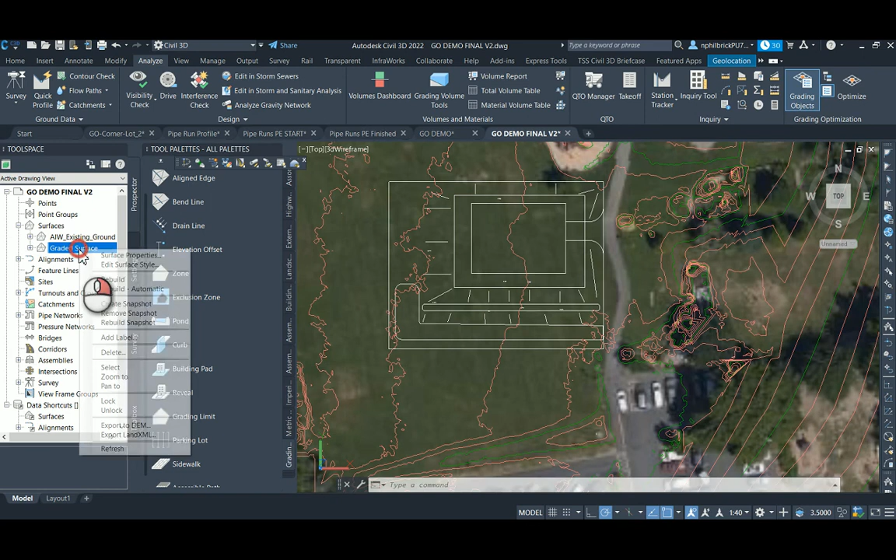So previously what I did when I let it run a lot longer, I created this graded surface. We'll just bounce into object viewer real quickly here. Let me go into surface properties, and I'm going to turn that EG off, and turn on this graded surface.

You can see that the contours, it was flat around the building pad. We get some sloping down on the back of the building. Let's take a look at this in Object Viewer.

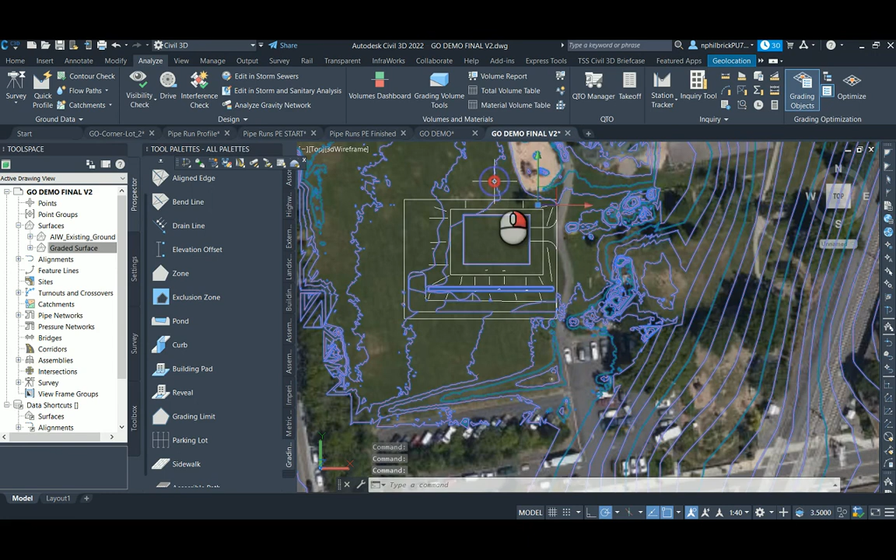You can see here, that's our building pad that we've created. Here's our flat region around it. We have it sloping down, and then we have our detention, storage, stormwater treatment right here, and a sidewalk that's going out and around the building. So that's in a nutshell, that's really what grading optimization can do.

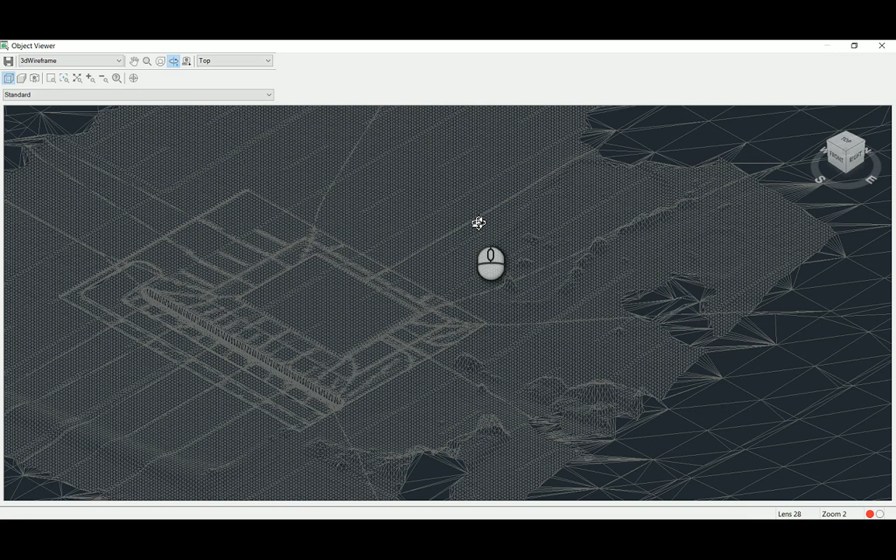You'll also find that there's a ton of content out there in some way, shape, or form on it as well, so there's a lot of different things you can do. It just so happens that I decided to build a building pad, put some sloping off the sides of the pond, and a sidewalk. So moving back over to my presentation here, we'll wrap things up real quickly.

So for grading optimization, one thing I wanted to leave you with is if you're interested in participating with new functionality and workflows, you can join the Autodesk Infrastructure Futures. If you have a Civil 3D subscription, then you have access to this, and it's a way to participate with development and basically get access to new features if you want to test them out and see how things are going.

For example, there's a lot of corridor targeting that came out with this new build, this beta 3 build, and I got a couple notes from development asking if I have any feedback for them. So you're going to see some enhancements to the following with this new beta build: super elevation view styles, the corridor efficiencies, and a lot of those pressure pipe features, basically adding pressure pipes and working with those pipe runs.

One thing to stay tuned for is the grading optimization update with 2022.2. Currently we have that .1 build out, and two things you're going to see with that update are retaining walls, so you can optimize a grading plan based on retaining wall design, and parking lots, optimizing a grading plan for a parking lot with open curb geometry around the parking lot boundary.